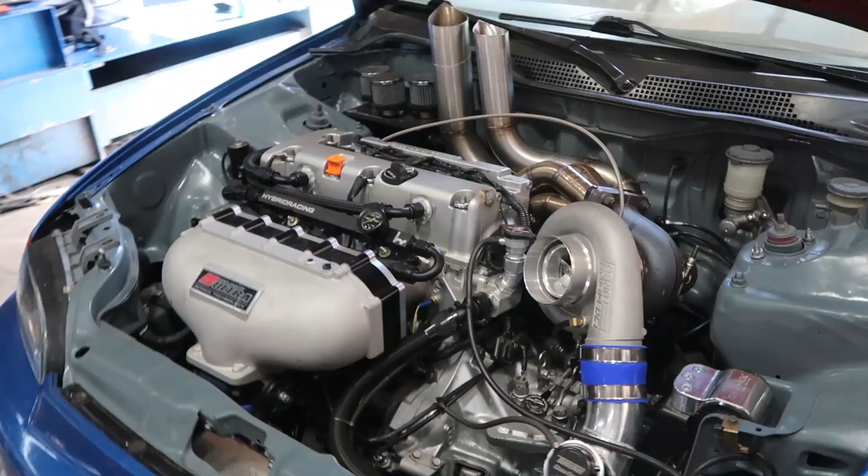I got this little blue Civic back on the dyno. I had a D16 Civic appointment today, but he canceled, so it gives me a little bit of free time to jump on ones I've been working on. I got to pull the drive shaft off again and get busy trying to finish this thing up.

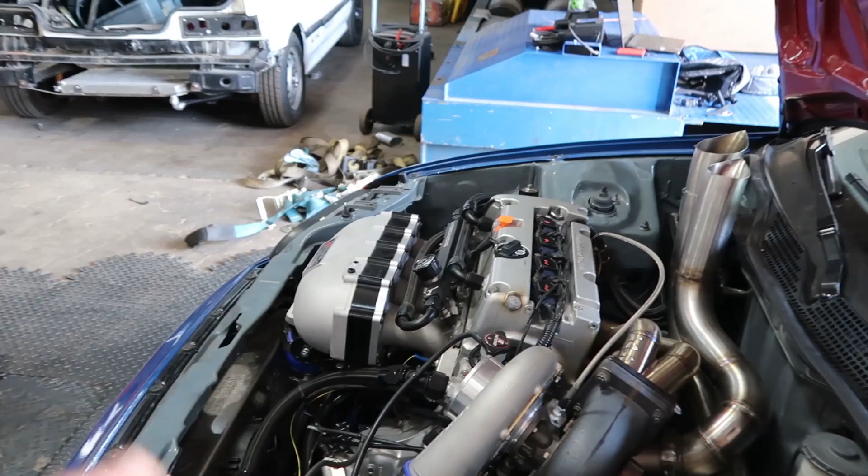See if we can't get those horsepower goals and get this little car worked out. So where we left off, I was having some trouble making boost. Sean jumped in here, pulled the wastegate off, changed the spring, worked on some of the plugs and fittings that go into the wastegate. That should be sorted out, so I'll know right offhand where we're sitting and go from there, because last time I had it on here, I don't think I could make much more than 5 or 6 pounds, if I remember right. So we're gonna pick up from there and try to knock this thing out.

All right guys, let's get busy.

So sick, man, you guys are all sharing and supporting. I dig that, bro, thanks dude. Gun fab, hard at it.

Alright, so I got good temperature in it. I'm gonna go ahead and make a rip, see how this goes.

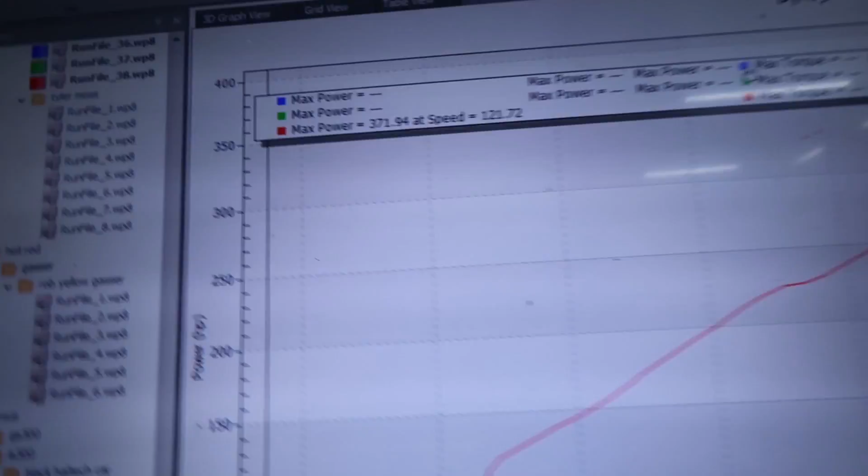Okay guys, made that rip. It looked like it was about 3.5 pounds of boost. Pretty decent air fuel, not too bad. Let's see what kind of power we made. All right, looks like 371 horsepower at 3.5 pounds. This thing ought to be getting pretty rowdy here.

Alright, let's get into it, see what we can do. Try some boost control.

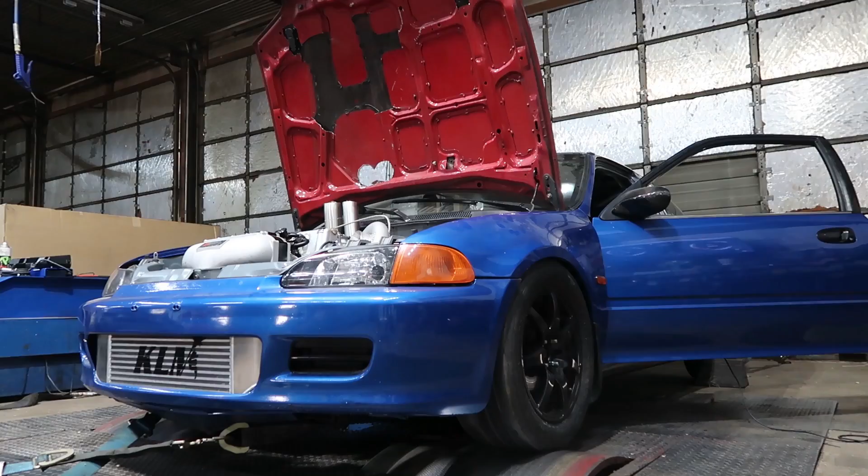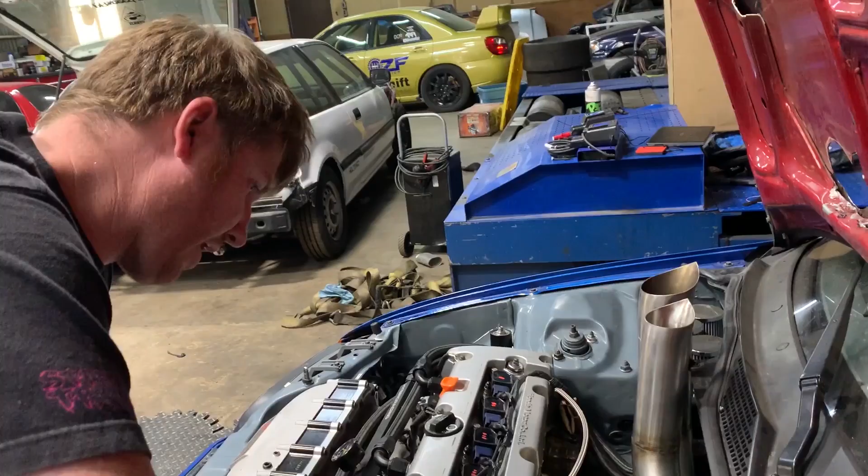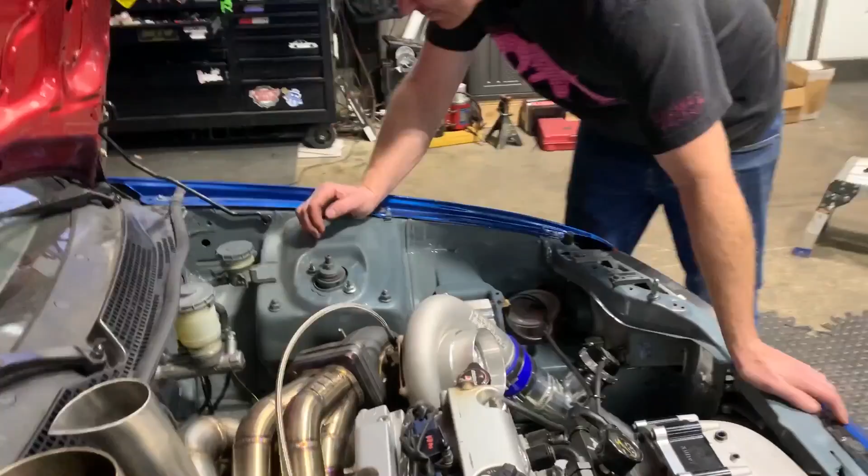So Sean, you put a couple wastegate springs in while I was gone. I did. So you're still a little confused why I'm only making 3.5 pounds. Yeah, I mean, this plate here, does it divide it or anything weird, or anything with turbulence or anything goofy that way? Not really, that was pretty normal. I mean, it is a big 60 gate, so any kind of opening, it's gonna lose a lot. Not the biggest fan of the 60 gate deal, but it can work.

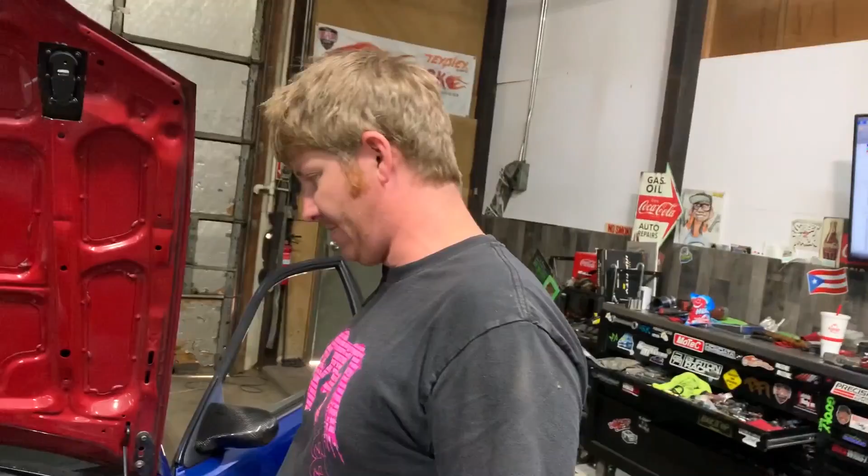Well, I prefer CO2 with them. Yeah, a little more control, but there were plugs that came out of it and the fittings were loose on it. I took the wastegate off, replaced them, put all the fittings back in, tightened them down, put a stiffer spring in it, hooked it all back up, and I would expect more than 3 pounds. You and me both. Pretty good power for 3.5 pounds, but that's where I'm starting off. So I guess I'll apply some boost control and see if she rips.

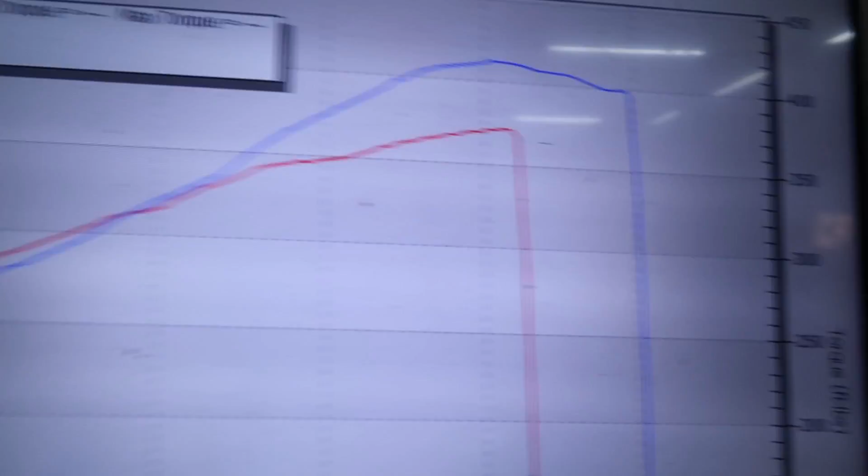All right, I applied some boost control, so let's get in this thing and see what she does. So peak was 412 horse, but I didn't make it till way out here, so I need to keep that in mind and figure out what's going on down here.

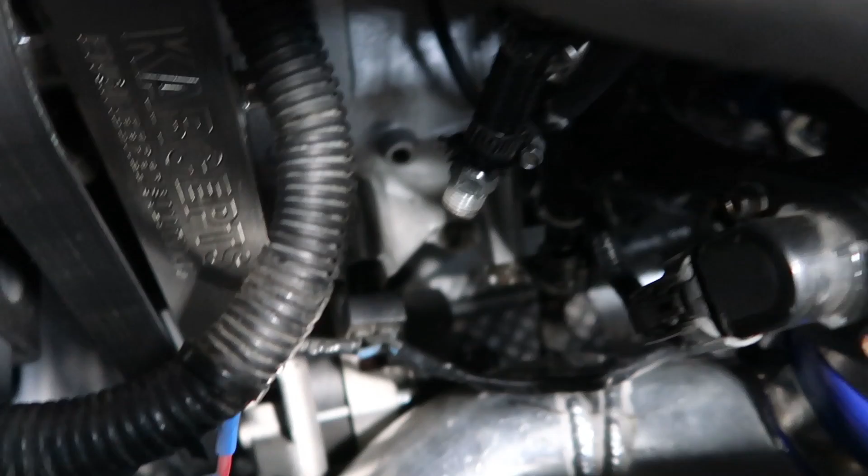I got smoke coming out somewhere over here. I thought it was the fuel pressure regulator, but it's coming out this side, pouring out of something here. Intercooler - oh I see, there's one clamp missing. A clamp's missing? Yep. Where's there a clamp missing? On this side of the intercooler.

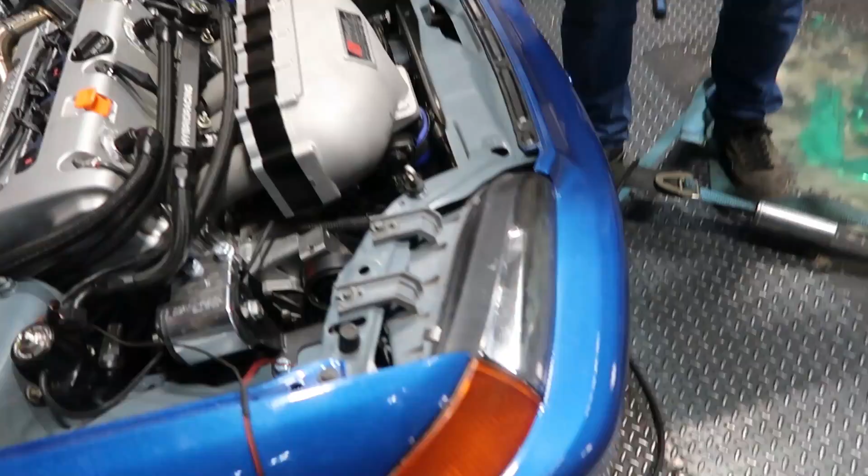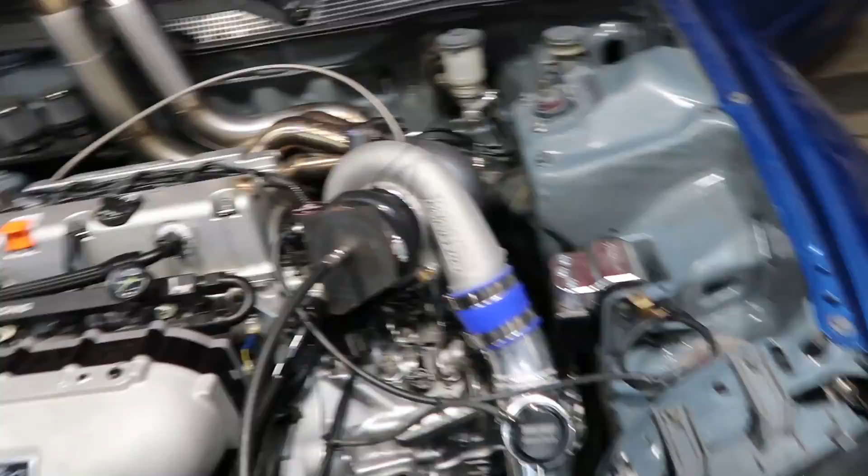I thought there was one in there because he already had like a boost pipe in there, all taped together. Oh, well, that's gonna change the game. All right, let's get this bumper off and we'll get the intercooler on.

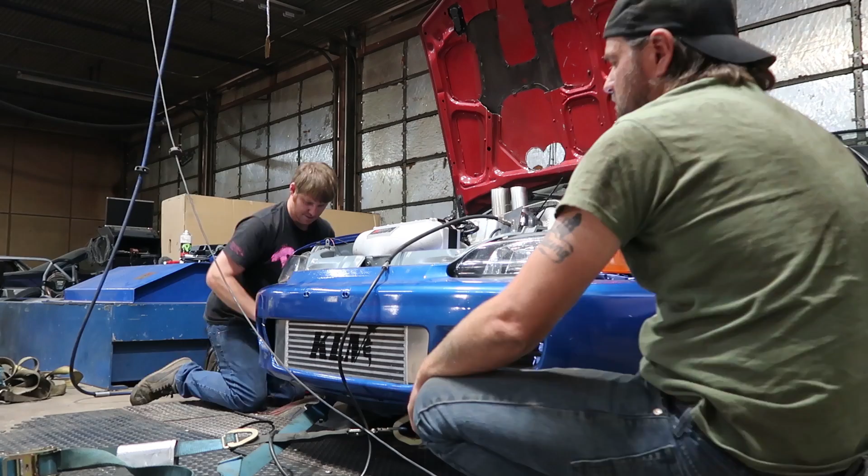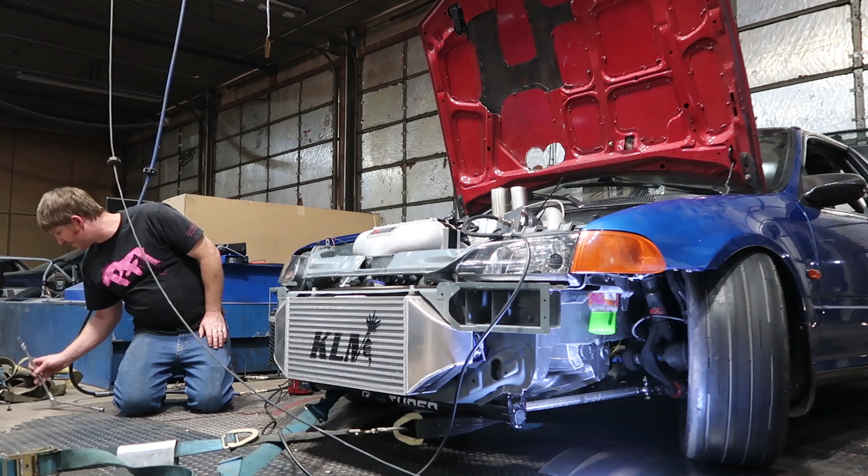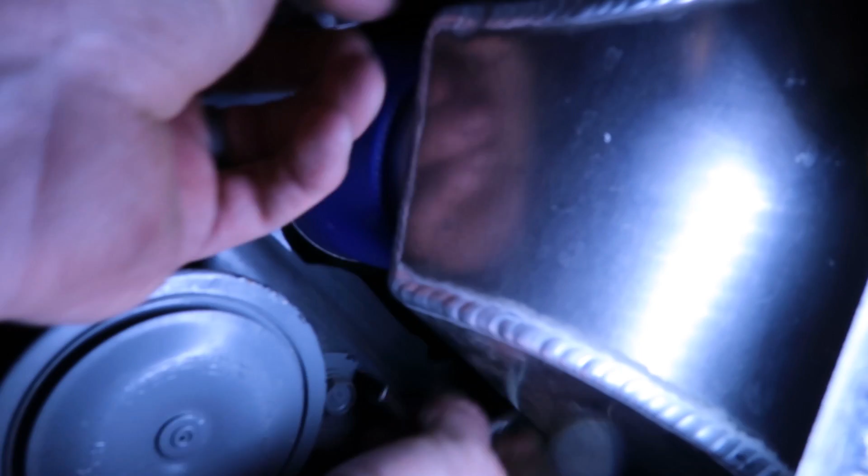Let's see back in here, I just gotta get my piece screwed back in. Yep, no coupler, it's hard to see. There we go, you can see that now. That should make a huge difference. It will definitely make a big difference.

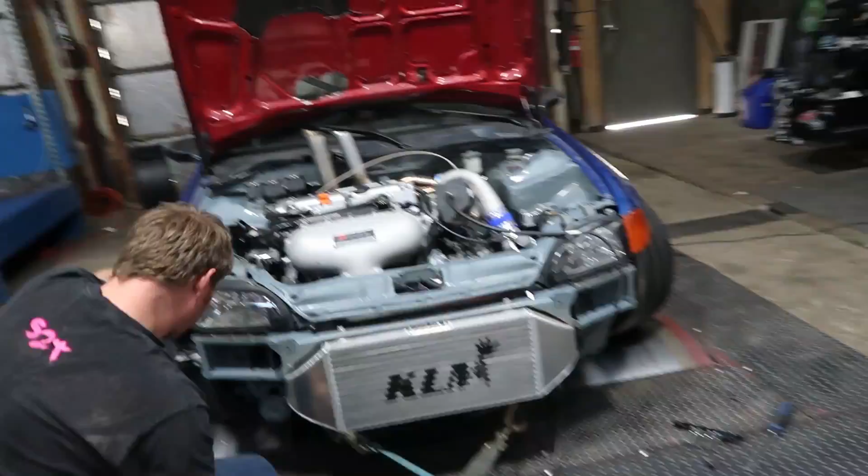Now it's time to party. So we basically made the power with some good CFM, even though it wasn't a lot of boost. So Sean has the throttle open now, and it doesn't look like we have any smoke, so things are looking excellent. Now I gotta turn the boost controller down because we're gonna make a lot more jam really quick.

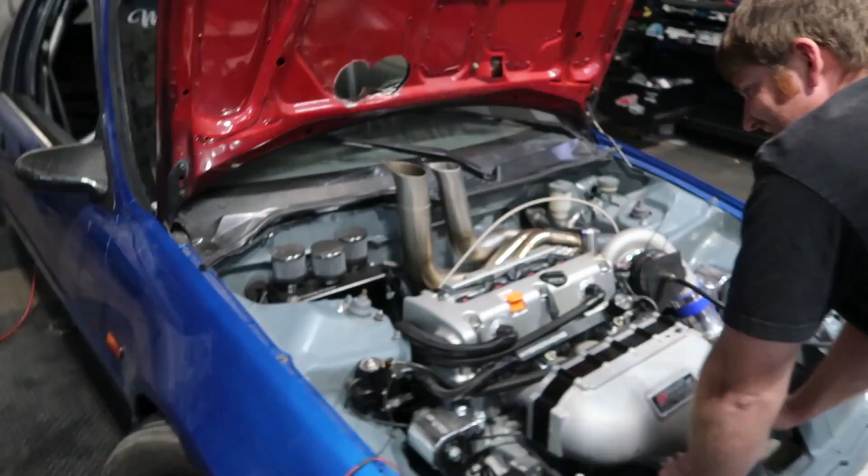It's amazing what a clamp will do. All right guys, so we got a clamp on the back of the intercooler, and that's gonna make a huge difference here. So I just took all the boost control out. Things are set on the dyno, I'm ready to make some jam. This ought to be a party. So hold on tight, let's rip.

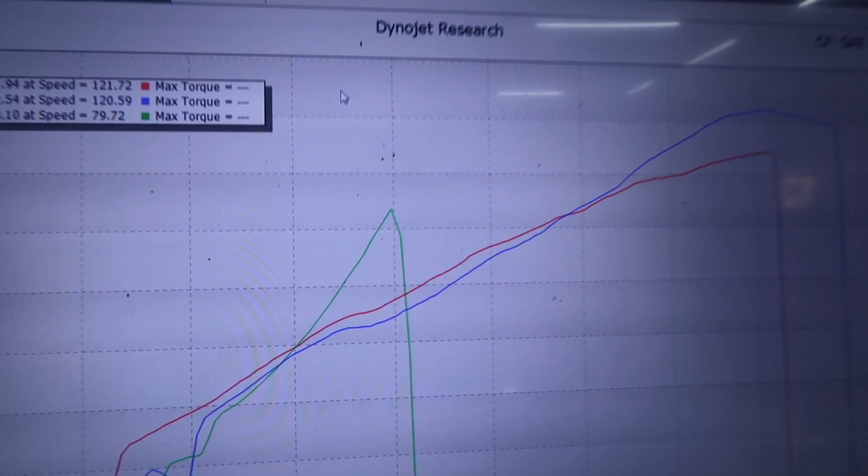A lot more fuel, but now it's gonna work. It's definitely waking up. Alright, so this is still no boost control, we're just trying to get a handle on it.

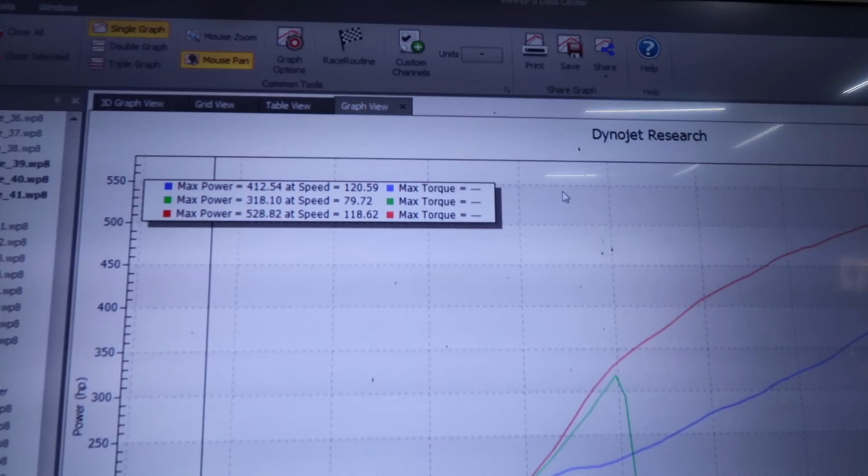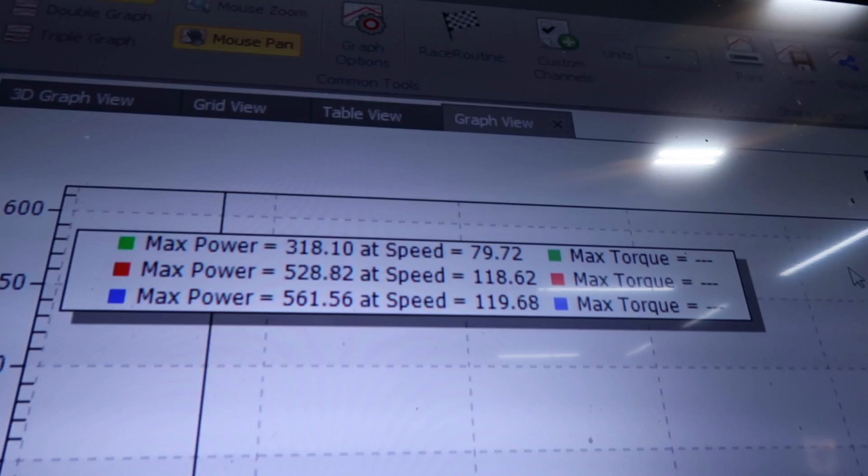560 horsepower, and you can see where it started to get some boost duty and the lines started to separate. That means we're right on track. This thing's gonna start coming around, and I'm looking forward to that.

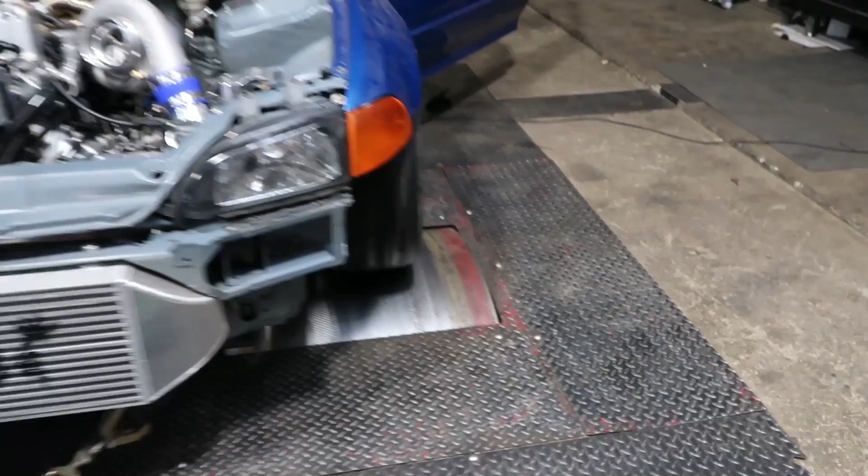So you can see this tire's straight, and this tire's turned in a little bit, so it needs a little adjustment. I'm kind of duking it out in the car trying to find out where I need to be. I think we're gonna take care of that real quick and then make another rip.

All right, so we got a little boost control in it, and we're gonna keep pushing, see where we can go.

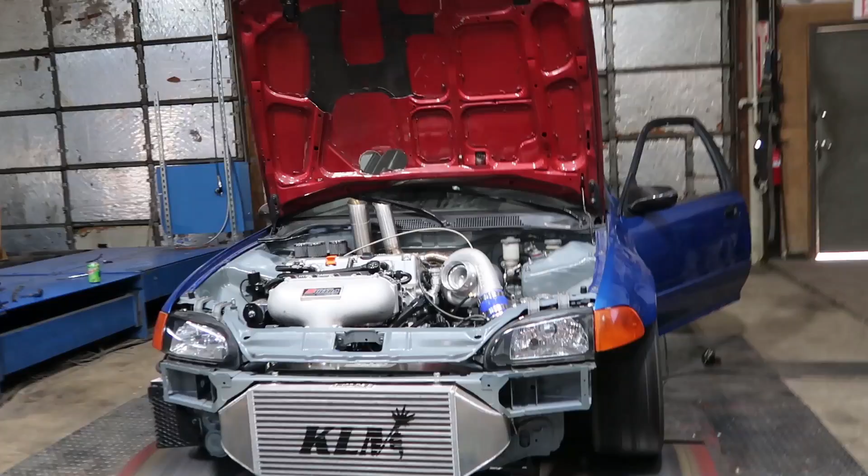It was shooting up. Yeah, we just gotta check the plug gap. Let's put the fire out.

Alright, I'm done with this. Yeah, unfortunately.

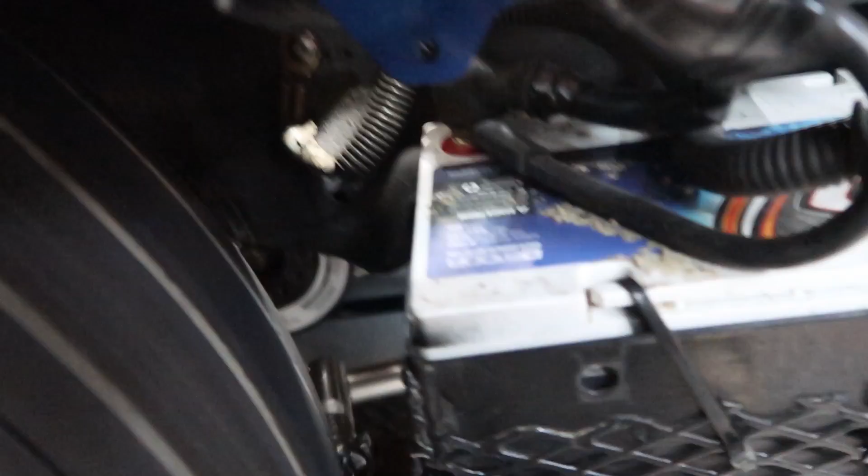I was over here checking the K car out and I noticed the belt's starting to walk there, so we'll spin this guy around and get him back to where he belongs. Just gotta put this on the way it goes and then keep one hand on it while I spin it and it should walk back on.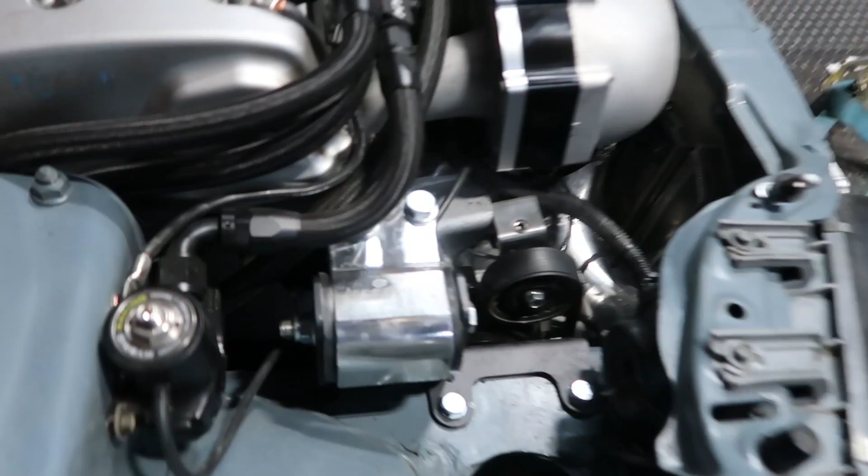Alright, got the belt all straightened back out. Sean got the plugs in. Sweet, see if it makes some more steam. Let's go.

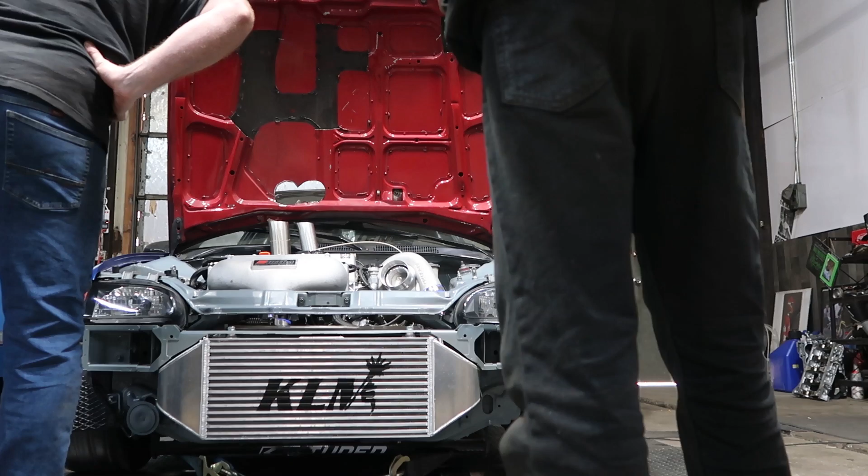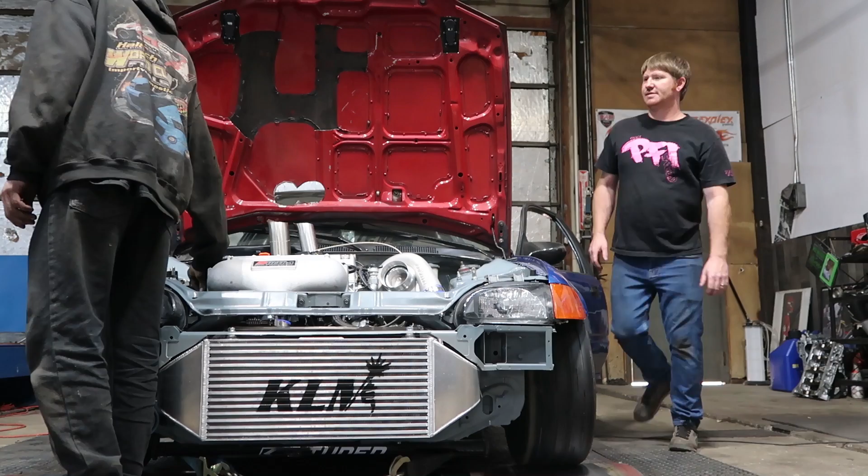Yeah, we're going to. Better? Yeah, you definitely got a couple turns on it. Definitely.

All right, let's go. Definitely need more fuel on top. She was ripping.

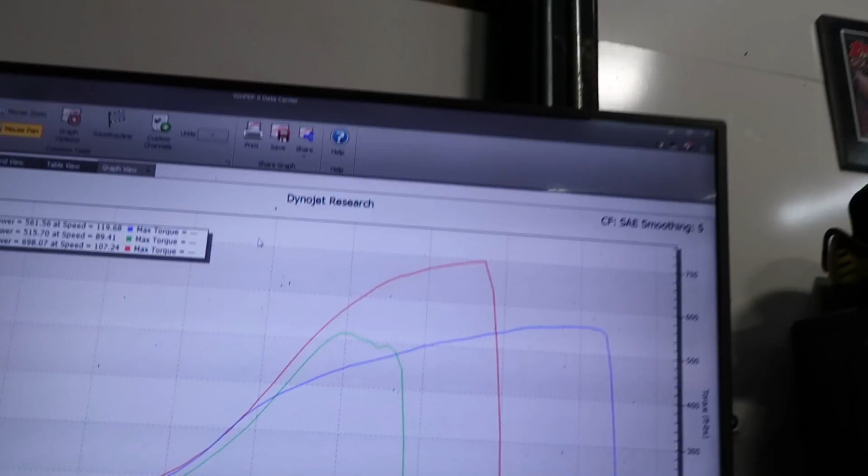698! Just need a little more fuel. I couldn't hold on to it. But you definitely about hit that 700 mark. Pretty much, 21 pounds of boost. That thing's a rock star.

Whoa, that was awesome. Yeah, that was awesome, rocking and rolling. Jay, she's ripping now, dude. Yeah, man, pretty good, your belt fixed everything. Yeah, belt and the plugs, you guys knocked it out.

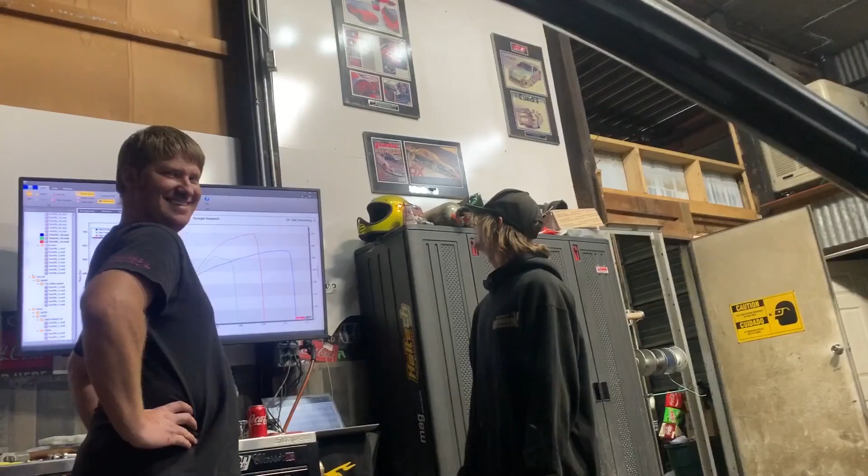Now if I can make her drink all this fuel. Let her drink, that's it, let her drink. Alright, I gave her some fuel, so I'd like to see where it goes. Yeah, let's rip.

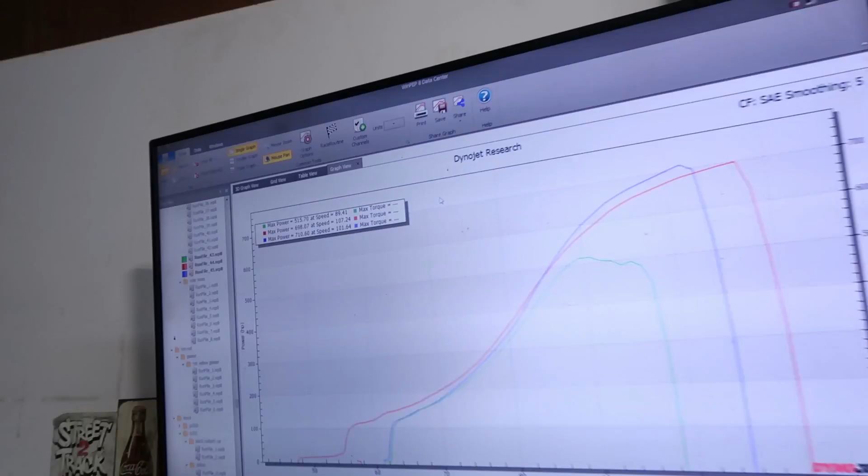710! 23 pounds, dude. But my fuel still ran away, so... fuel pump pickup stuff. Do you know what fuel pump's in here?

All right, so I noticed a glitch in the matrix here. My map was starting to just run out of area, so I had to start from scratch, put in a base tune, start working things over. I've kind of rough tuned it at this point, and now I'm going to start making rips again and getting a handle on things. Shouldn't take me very long, but I did have to take a step back to go forward, which once in a while you just gotta do.

Sometimes they don't want to cooperate. Every system has its little bugs and kinks. You work through them, get it done, keep moving forward. We ain't got time to look at what was. We need what is. So let's go do that.

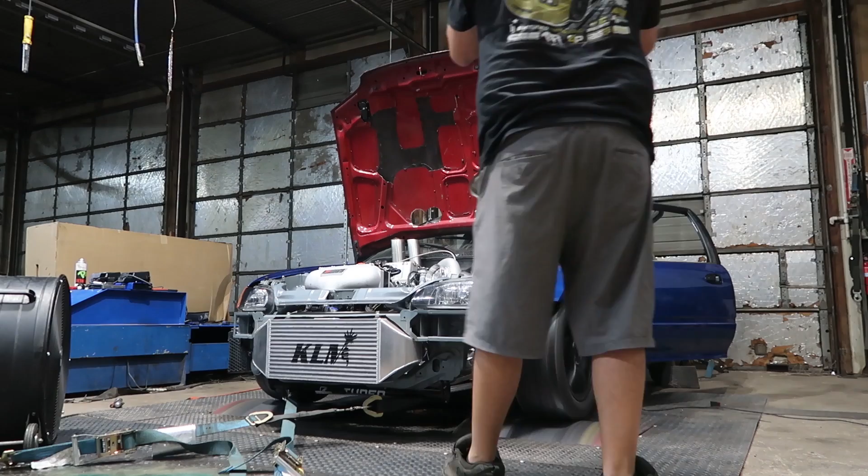Well guys, the fuel pressure's fallen. My man walks right in from his trip and instantly diagnoses the next issue. So we gotta look at the fuel system. That was 690 horse on the new map that I just built. And it looks like we're out of fuel, so we're stuck again.

Well, I haven't got a whole bunch of fuel loaded, but if I'm falling pressure, like... Yeah, exactly, it was already starting to take a ramp. No point in just patching it with that.

But Jamie did just drive a billion hours, and this is the first time he's been in the room, and here he is saving the day. So you saw the fuel pressure come up? It came up to around 90, and then it fell back down to probably 50.

Oh, because I got base at 60. Yeah, it probably fell down. It might have been 60 that it fell down to. Well, it fell, regardless. Yeah. And that's not going to work.

Not at all. We haven't really looked at the pumps or filters on this. Yeah, it's been a filter month. We've had the crappy filters in about every other car we've touched. That's probably next.

So it doesn't look like I'm going to finish this one unless I turn it down, but he's got 800 horsepower goals, so I don't see turning it down. No point in that. All right, so I'll be back on this one, but for right now, we are stuck right here.

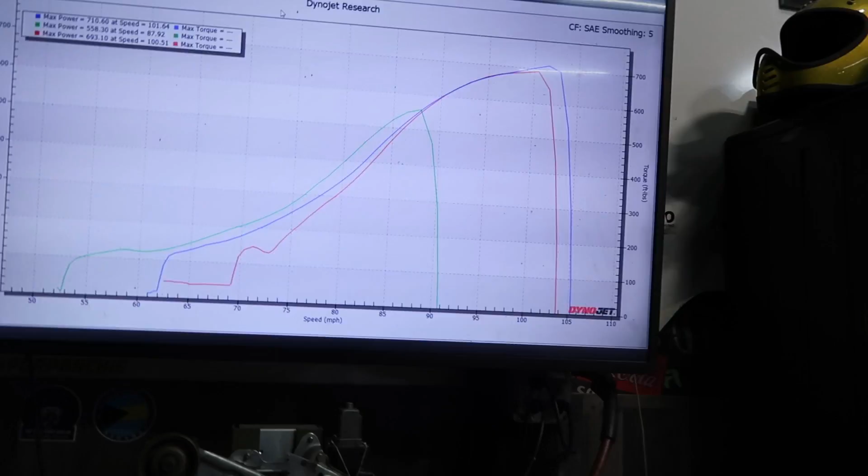Almost 700 horse, it's a nice little curve so far too. Yeah, it's gonna be a ripper, man. This thing's gonna be out of control.